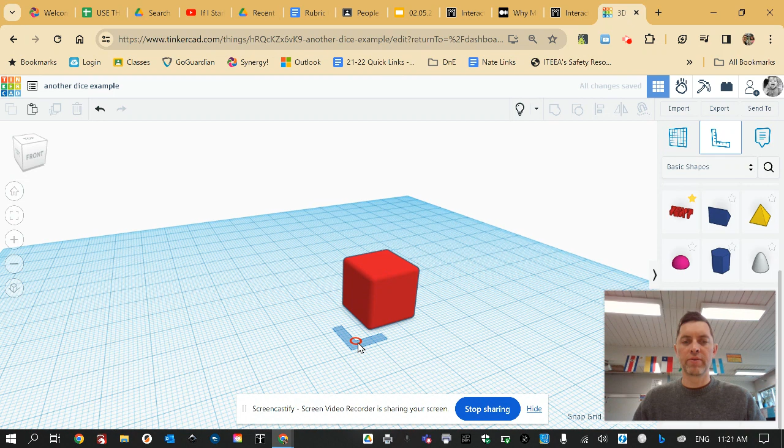It doesn't quite matter where you put that on the screen, just have it on there. Next, if you haven't already, you should measure your dice. It should come out to about 16 millimeters. You may have a smaller or bigger dice, but somewhere around there.

So only measure one side. There's a reason for that. Think about the properties of this die as a cube - the height, width, and length of the faces should be equal.

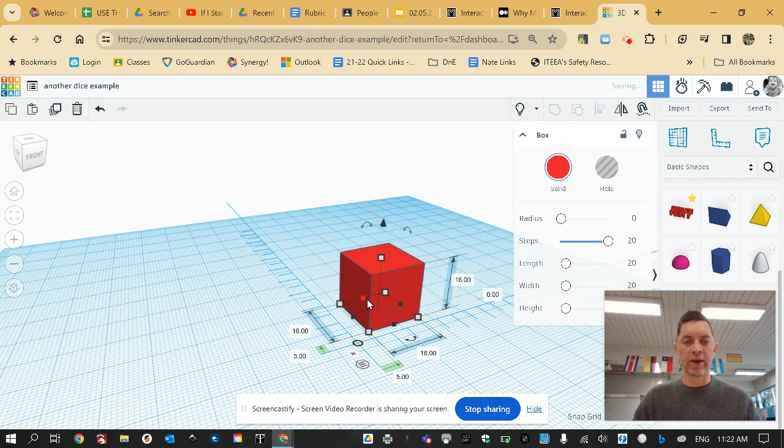I've already changed the radius to a small number like 1.5, because without it you can see it's nice and sharp on the edges. We want just a little bit of rounding there, not too much. Too much rounding, like putting it at 5 or 6, and it starts turning into a circle or sphere.

To keep it from being really chunky, I raise the steps so you can see the chunks there. Raise the steps up to as many as I can.

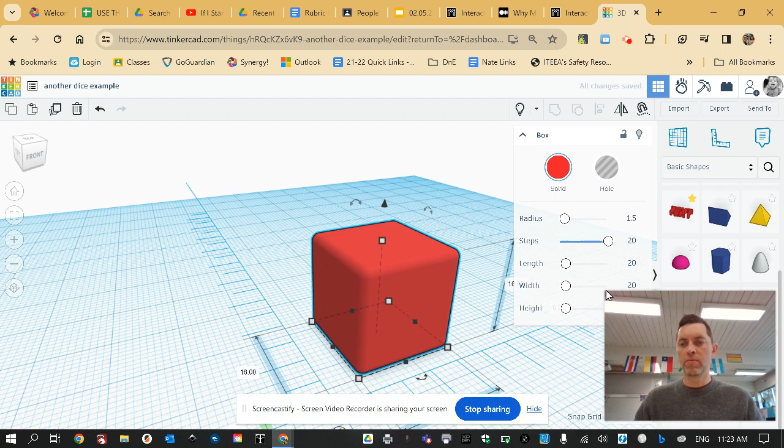Now that I have my cube, the next step are the pips, the holes, and we're making the 4 or 5 side. I like using half spheres - some other people like spheres. Go ahead and pick your favorite.

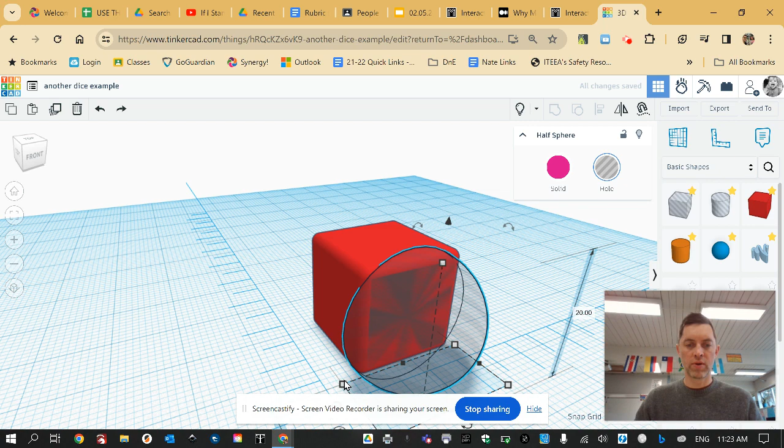And then we're going to shrink these guys down, holding shift. You can shrink that - wrong shift button. Shrink that down to the correct size.

Also flip it over, which is helpful, and we'll worry about raising it up in a second. I'm going to face this side so it makes it a little easier.

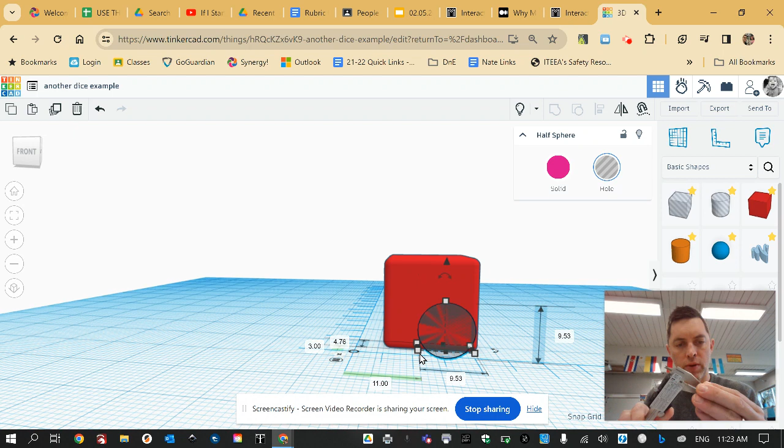If you haven't measured the pips yet, go ahead and measure those as well. They should come out to about 3.5 to 4 millimeters. So that goes in here as well.

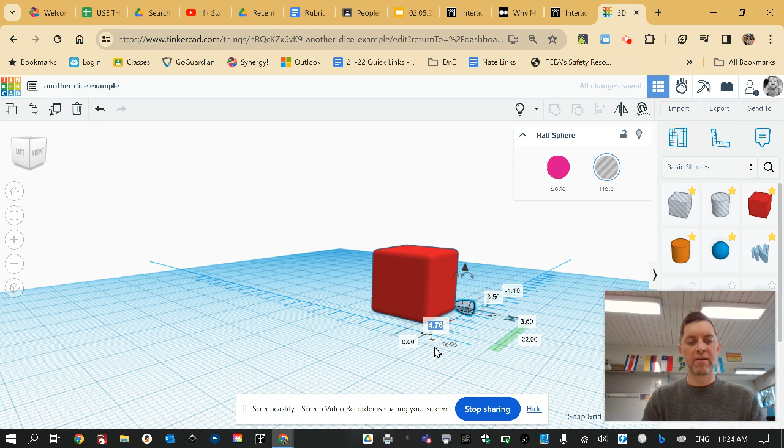Depth-wise, you don't want to make this thing too long or it'll run into the other ones. Right now it's set at 4.7. I'm going to take the depth down to about 2.5 or 3 millimeters - not too deep because you don't want it to connect with the other sides.

We're going to raise it up. We want 4 of these, right? And we're going to push it back in there so it meets the face.

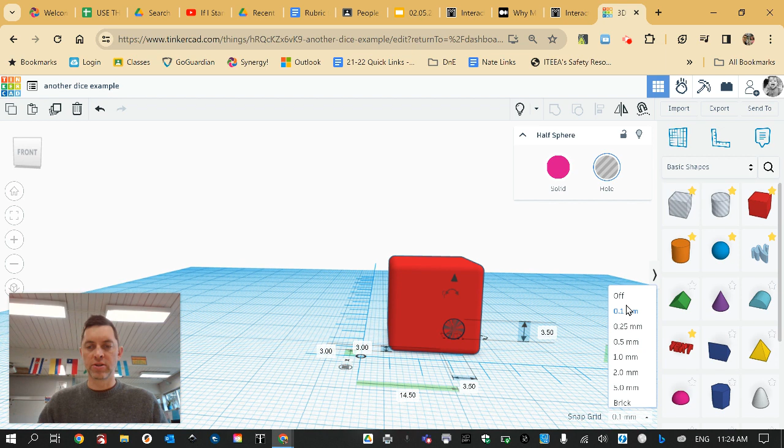Now you might notice it is moving too much - let me get over here on the grid. So I'm going to change the snap grid down, and we can align this on the face as well, making sure it's aligned now with the grid, or with the face.

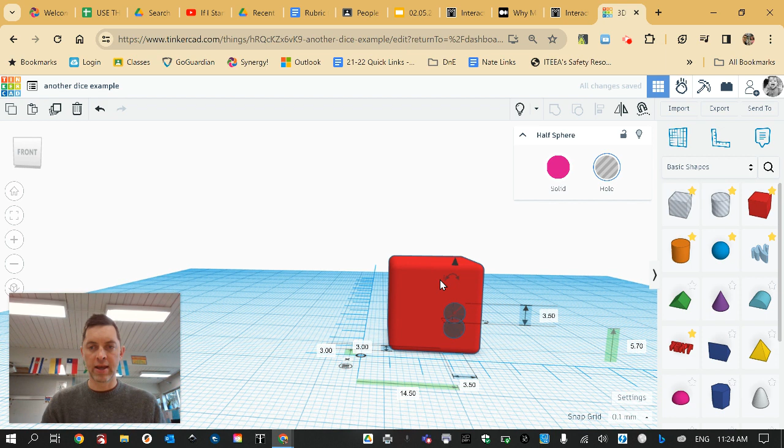Want 4 of these, right? So I'm going to duplicate it, and I'm going to hold control and push up, sliding that up to what looks like a nice amount of space.

You may choose to move these up or down a little bit. I like these 2. Now I'm going to group them so that I can align them on the face.

And then I'm going to duplicate them and bump them over so we can get the 4 side here.

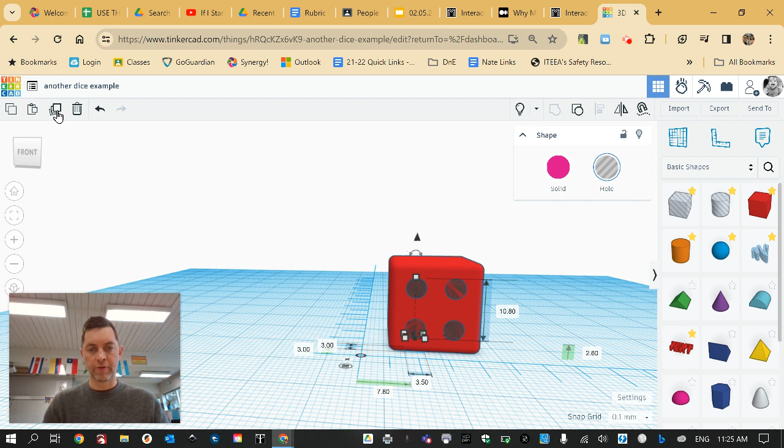Now you might be looking at it and it looks a little too narrow. So I think I'm going to take these 2, move them a little wider, move these 2 a little wider, something possibly like that. You may even choose to ungroup these and bump them out a little more too.

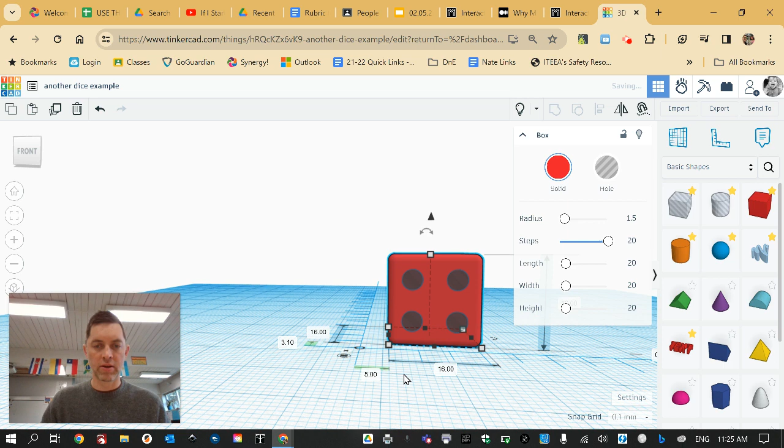The cube is being a pain in the butt. I'm going to bump it back 1 click. I'm going to ungroup all these - they're nice and aligned though.

So I'm going to take these 2, choose them together as a group, hold control, click up a couple times. Hold control, hold shift, choose both of them, hold control, click down maybe once - like that, spacing better. I'm going to choose all 4 now and group them.

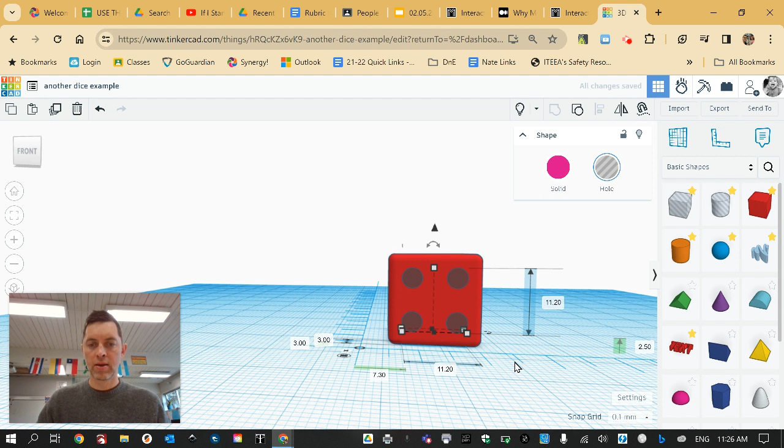And I'm going to choose the cube, align them in the center, and align on the front face. So now all 3 alignments should be ready to go.

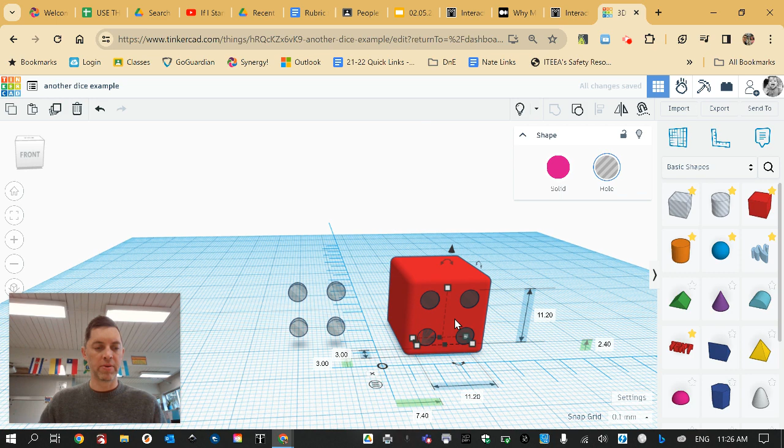It is ready to group and cut those holes. But before I do that, I'm going to duplicate this and save it. Give me a guess why I might be doing that in the comments.

So group it. Now we have the 4 side done. Turn it around, flip this 90 degrees.

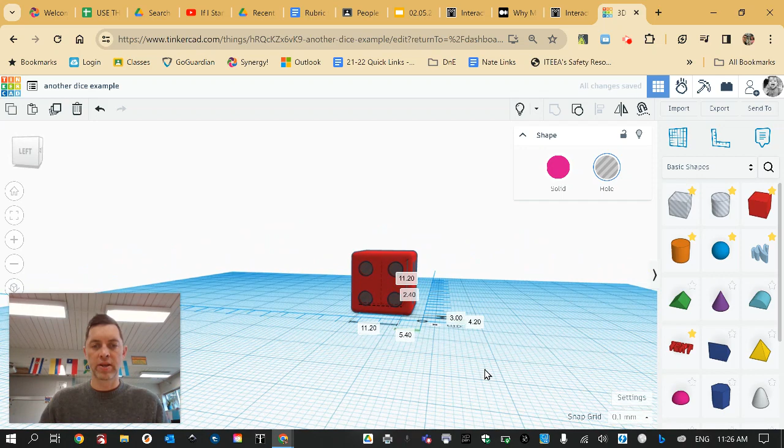You can line that up with the face as well. And all you're missing is one more of these pips and you are done with the 5 side, right? So that is the reason that I duplicated it.

I'm going to ungroup for a second. Duplicate one of these, control, move it down. Actually, I'll teach you another trick here.

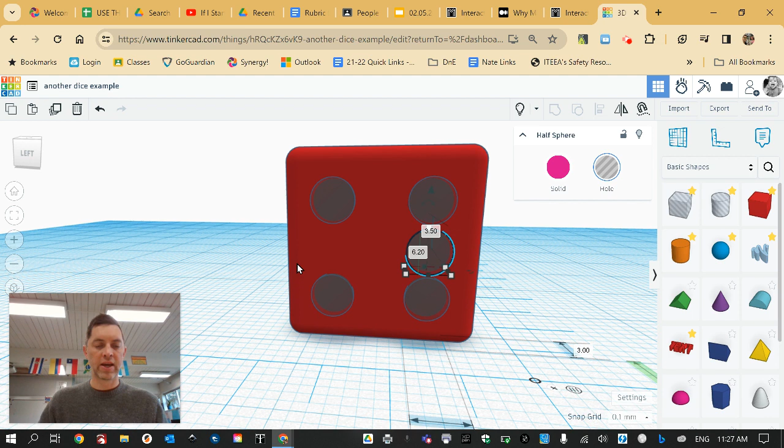If you want it to be dead center, the easiest way would be to just click on it. You already have the other one centered. Click on the cube, choose the Align tool. You don't even have to move it around - it will find the center for you.

Now that you have it centered, you could choose all of these again and group.

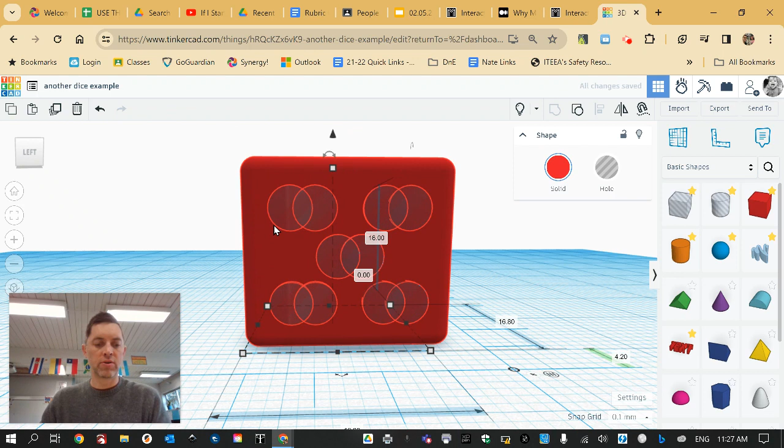Again, before I cut the hole, I'm going to duplicate that. Oh, whoops, I grouped the wrong things there. Undo that before I cut the holes - take a step back, apologies.

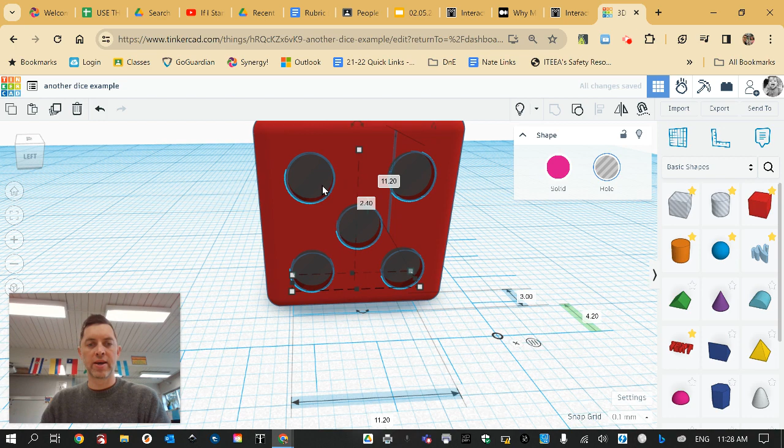Group the 5 holes together, duplicate it, send it out to the side, save it for another side. Now align these to the front and group.

All right, you're now on your way. You have 2 of the hardest sides done. Go ahead and finish the rest of the sides.